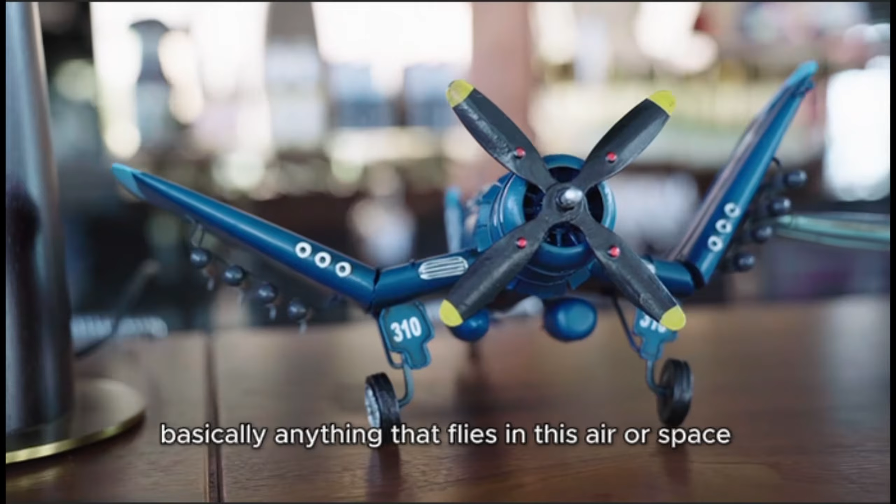I will start with introduction. The aerospace industry covers things like aircraft, spacecraft, satellites, and even missiles or drones. Basically, anything that flies in the air or space. Aluminum is one of the most used materials in this industry because it's lightweight but still strong, which is super important when designing things that fly.

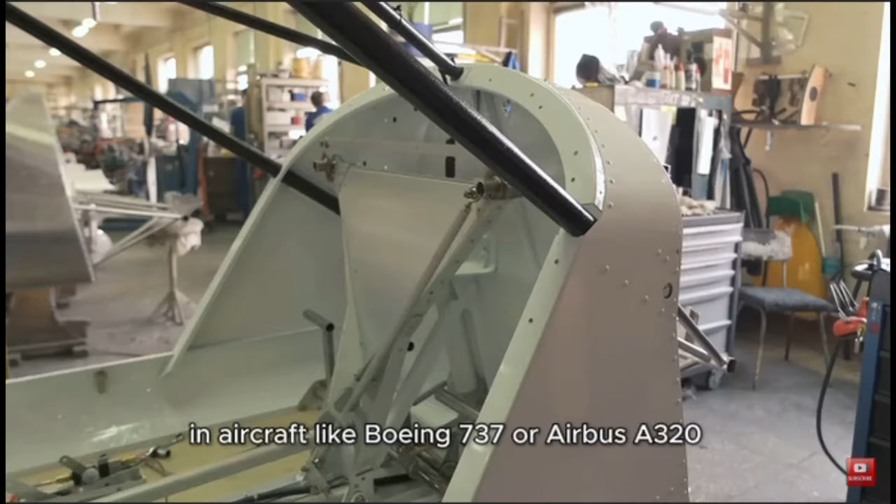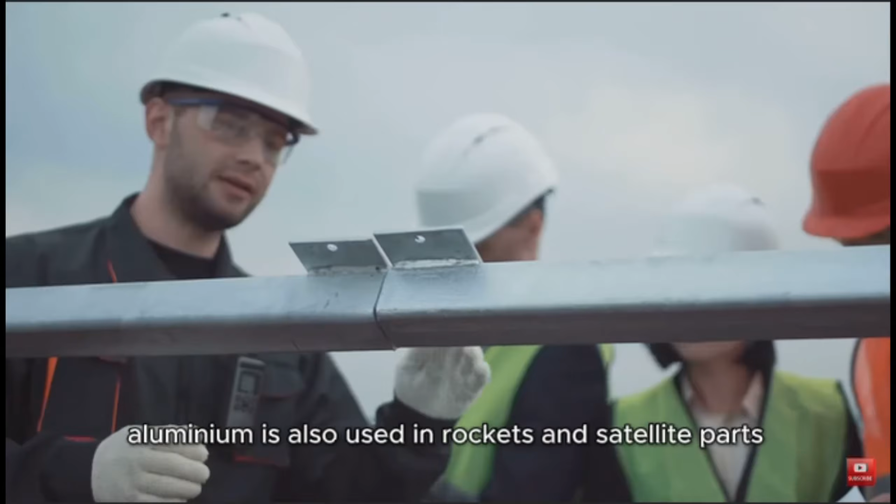For example, in aircraft like the Boeing 737 or Airbus A320, aluminum makes up about 70% to 80% of the structure, including wings, body, and landing gear. In space applications, aluminum is also used in rockets and satellite parts because it can handle high pressure and extreme temperature.

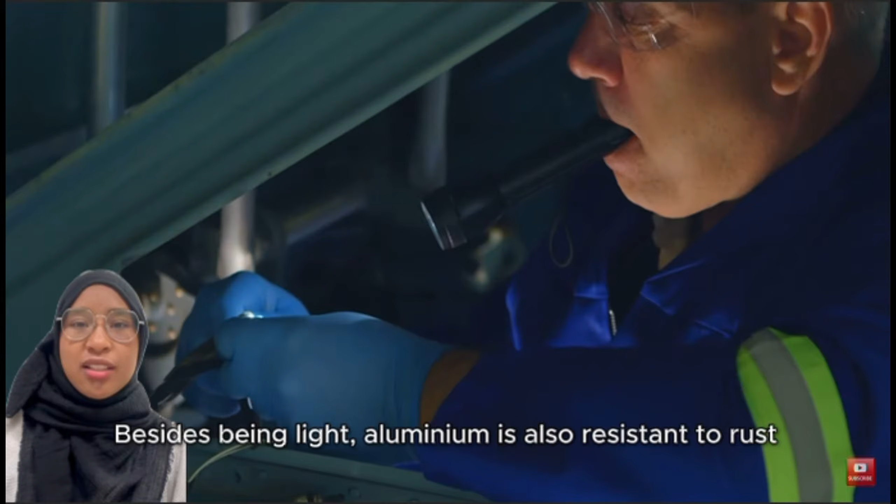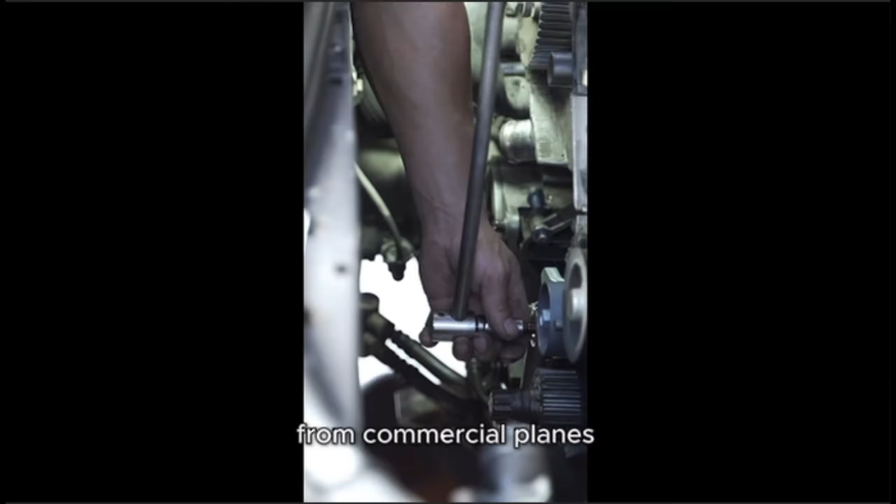Besides that, aluminum is also resistant to rust, easy to shape and recyclable, all of which make it ideal for building safe and efficient aerospace systems. That's why aluminum is still the top choice in many parts of the aerospace world, from commercial planes we fly in to space missions reaching beyond Earth.

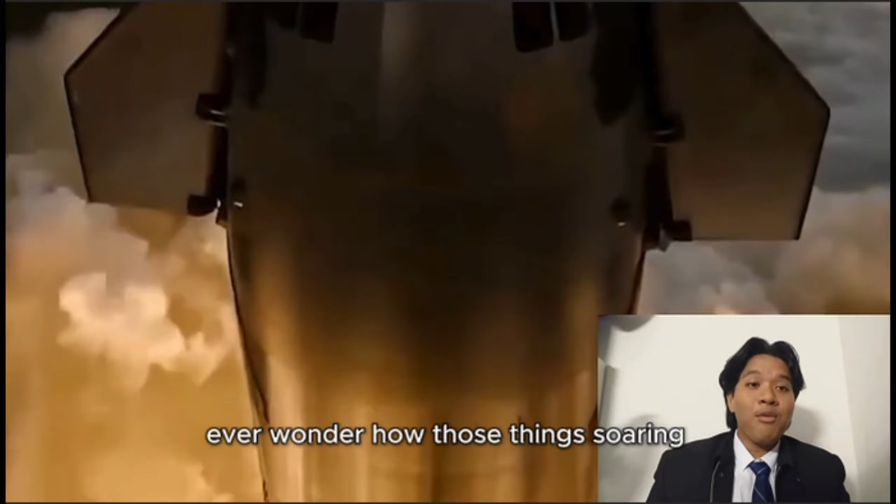Ever wonder how those planes are soaring and rockets launching into space? No, it's not magic, it's science. And at the heart of it all is an incredible metal you might take for granted, aluminum. So let's know more about aluminum, shall we?

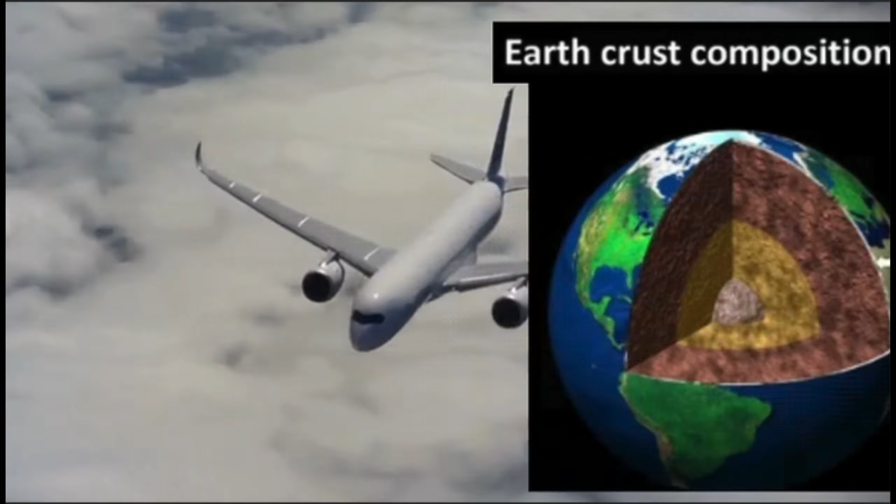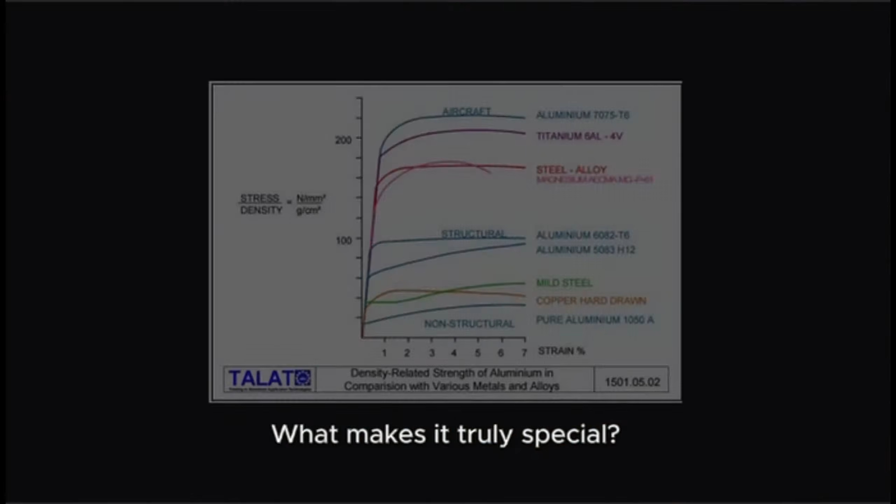Aluminium is the third most abundant element in Earth's crust, but pure aluminium is soft. So how does it become a powerhouse material for aerospace? The secret lies in alloying. By adding small amounts of other elements like copper, zinc, magnesium, and lithium, engineers transform soft aluminium into super strong alloys. It's much stronger. What makes it truly special? Its incredibly low density. Imagine materials that are as strong as some steels, but a fraction of the weight.

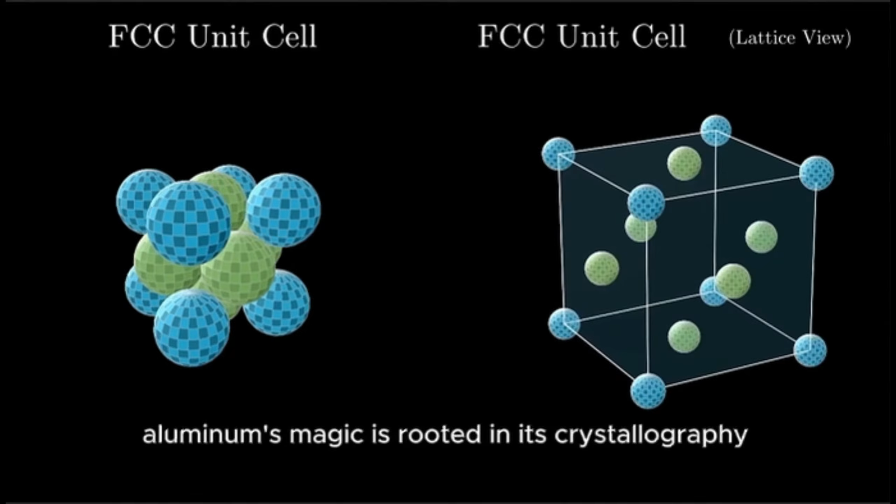Delving deeper, aluminum's magic is rooted in its crystallography. Pure aluminum has a face-centered cubic structure. This dense atomic arrangement makes it strong and stable while giving it many slip systems, allowing it to deform without breaking. Perfect for shaping those complex aircraft parts.

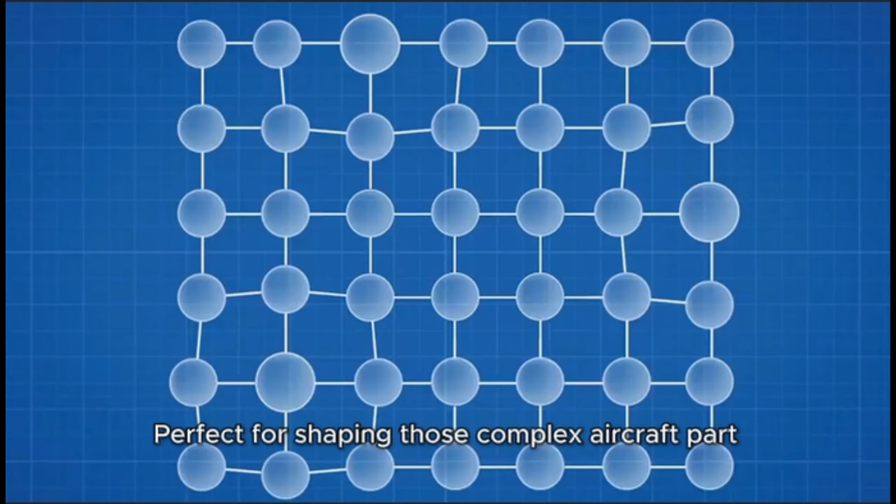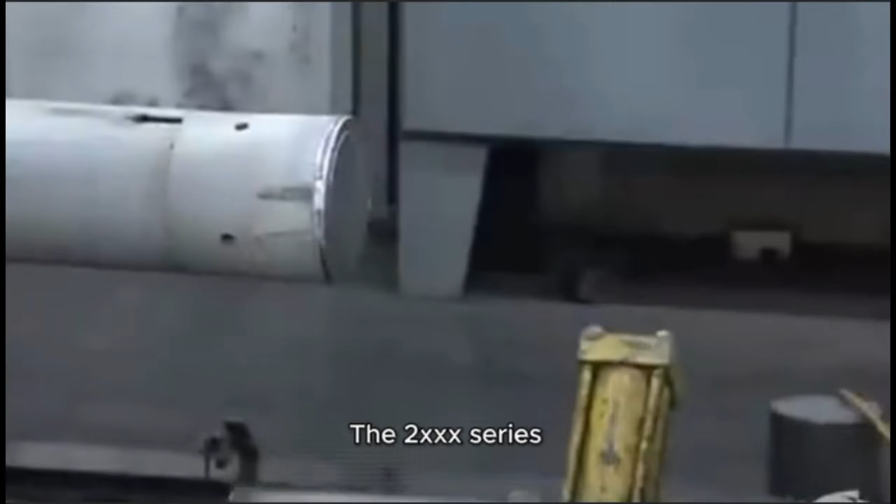The aerospace industry primarily relies on two star players in the aluminum alloy family, the 2000 series and the 7000 series. The 2000 series, with copper as its main alloying element, are known for their very high strength, achieved through precipitation hardening. They are perfect for aircraft skin and structural components, providing an excellent strength-to-weight ratio.

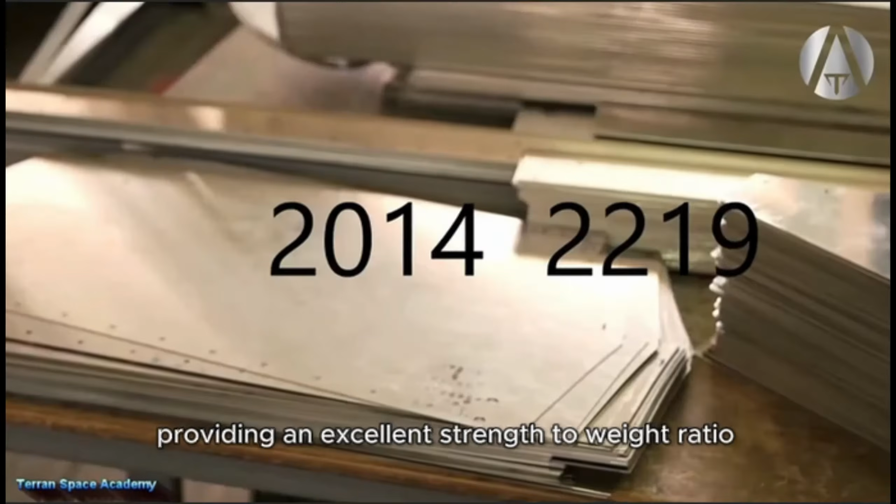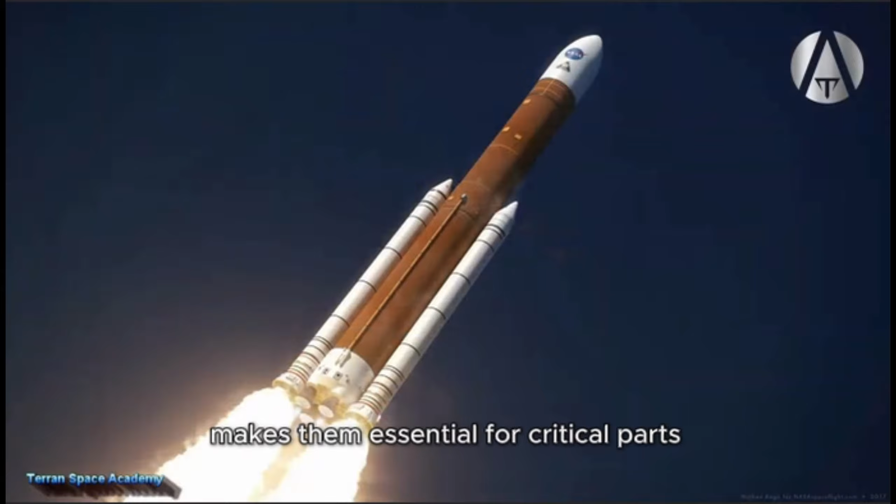Then there's the 7000 series, primarily alloyed with zinc, often with magnesium and copper. Alloys like 7075 and 7050 are the absolute strongest. Their unparalleled strength and fatigue resistance make them essential for critical parts like wing spars and landing gear.

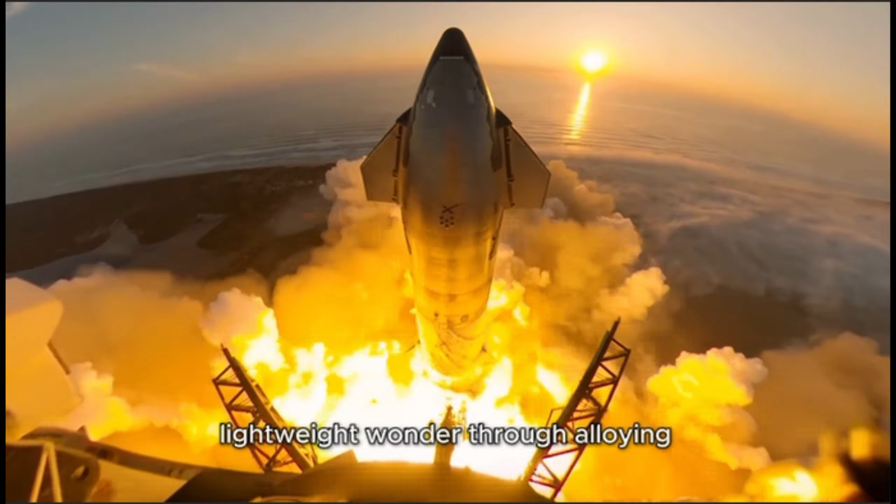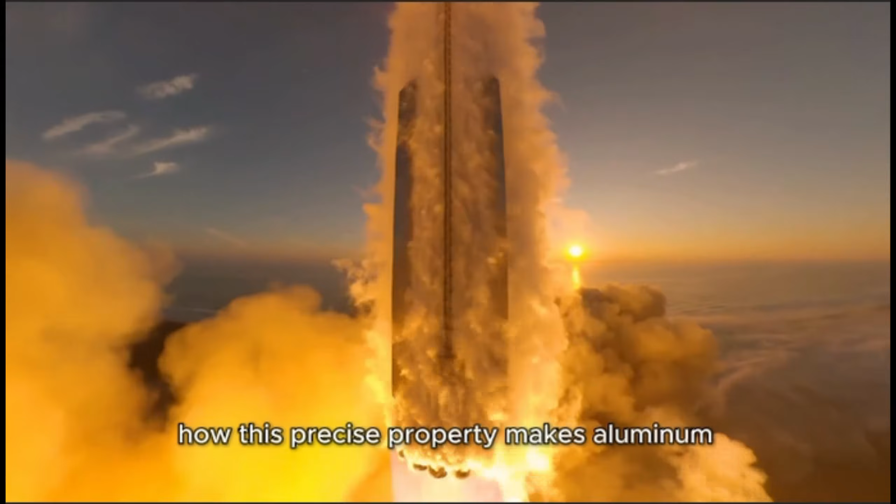Alright, we've seen how aluminium goes from a soft, abundant metal to a strong, lightweight wonder through alloying. But why is this transformation so epic for planes and rockets? It's all about unlocking those critical properties. So get ready to discover how these precise properties make aluminum the ultimate material for pushing the boundary of flight.

Okay, Assalamualaikum warahmatullahi wabarakatuh. My name is LUQMAN Al-Hakim bin ZUHABRI, and I'm going to present to you guys about the critical properties of aluminium alloys.

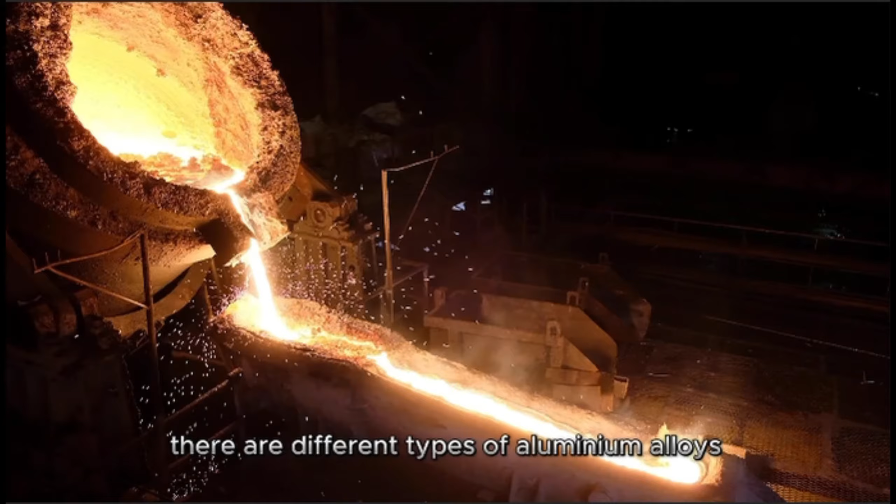There are different types of aluminium alloys used for different parts of a plane. For example, there is 2024 T3 that is used on a plane's body and wings because it is strong and can handle repeated stress very well. It is perfect for parts that face pressure differences and changes during every flight.

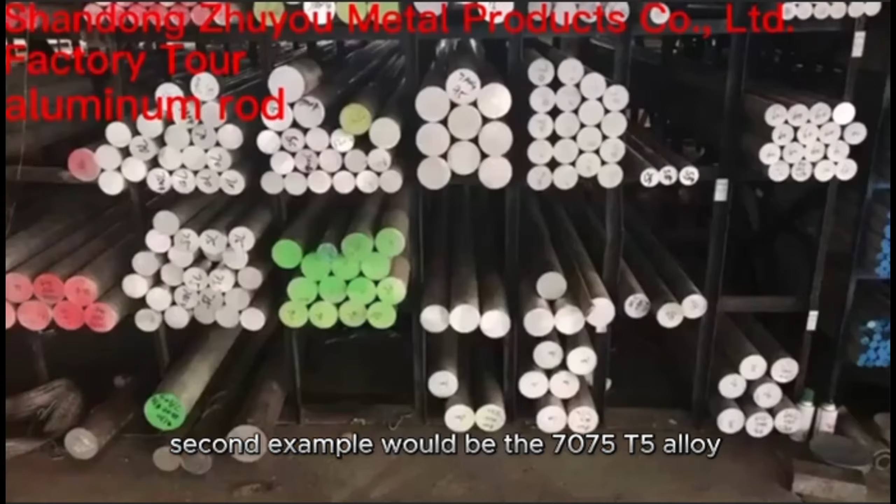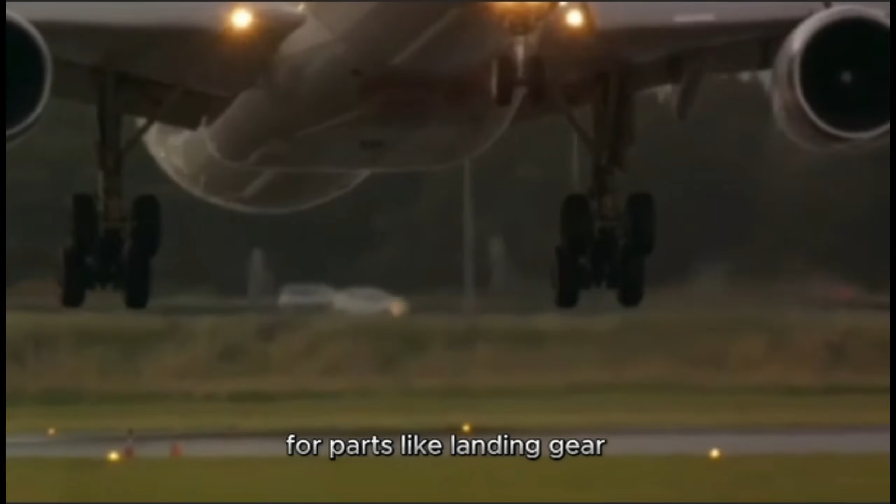Second example would be the 7075 T5 alloy. It is actually one of the strongest aluminium types. It is usually used in military planes for parts like landing gear and wing supports. Since it can rust more easily, it usually has to get a protective coating. And even though aluminium alloys are not used greatly for carrying electricity, sometimes they are still used for things like grounding or blocking signals.

So in summary, aluminium alloys are still very important in making aircraft. Each type is chosen carefully depending on what the part needs, whether it is strength, flexibility, or rust resistance.

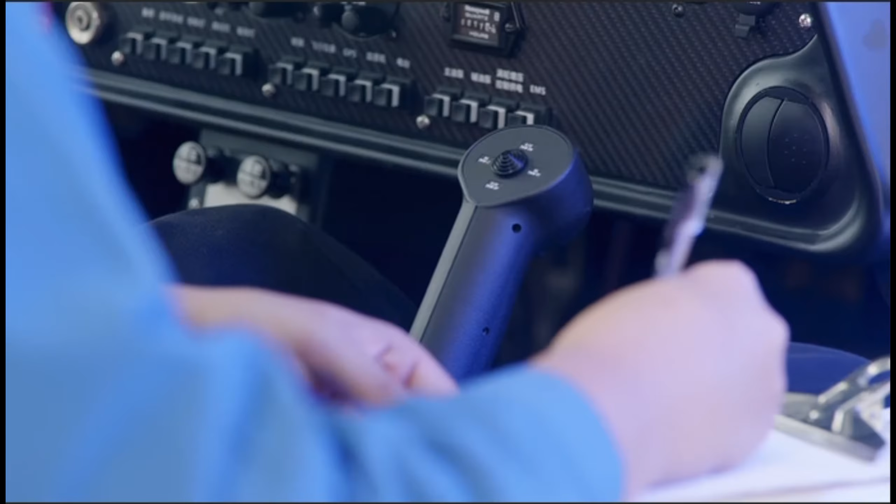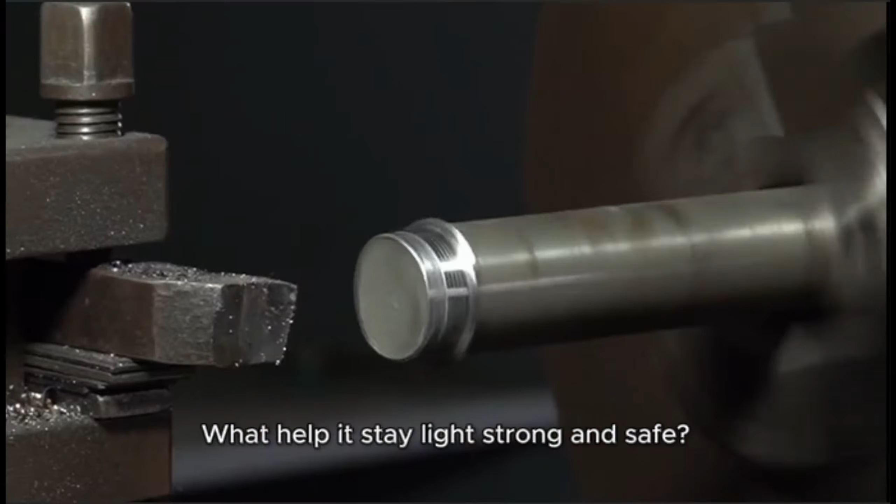Hello, I'm Non and I will continue from here talking about the advantages of aluminium in aerospace applications. Have you ever wondered what airplanes are made of? Let me show you something interesting. It's all about aluminium. So why is aluminium important in planes? Imagine a plane flying high in the sky. What helps it stay light, strong and safe? One big reason is aluminium.

Aluminium is very light but also very strong. A lighter plane uses less fuel, flies faster, and carries more weight. Some types of aluminium are almost as strong as steel, but only half of the weight. And we also know that planes fly through rain, snow, and changing air pressure.

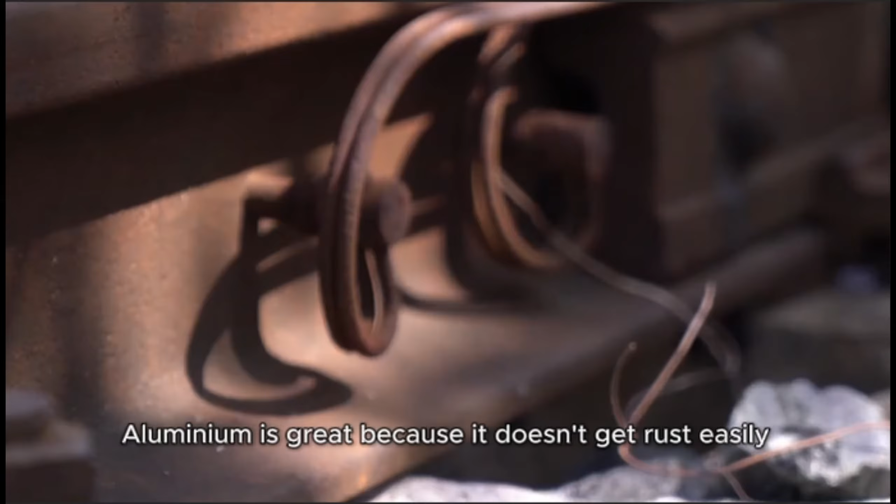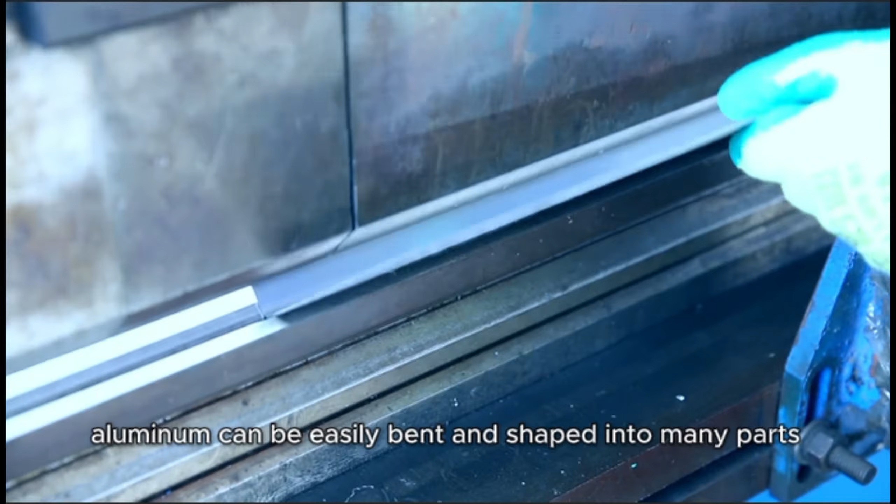Aluminium is great because it doesn't rust easily. This helps plane parts last longer and keep passengers safe. Also, aluminium can be easily bent and shaped into many parts, like wings, panels, and more. That means planes can be built faster and at lower cost.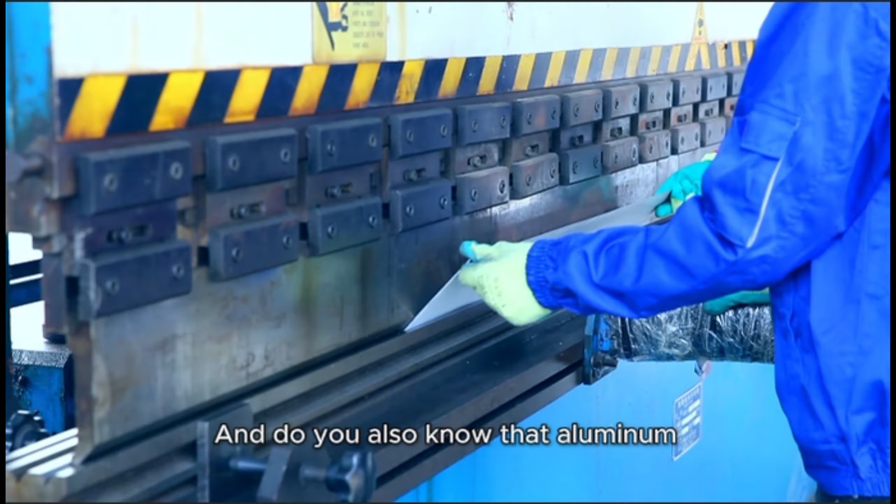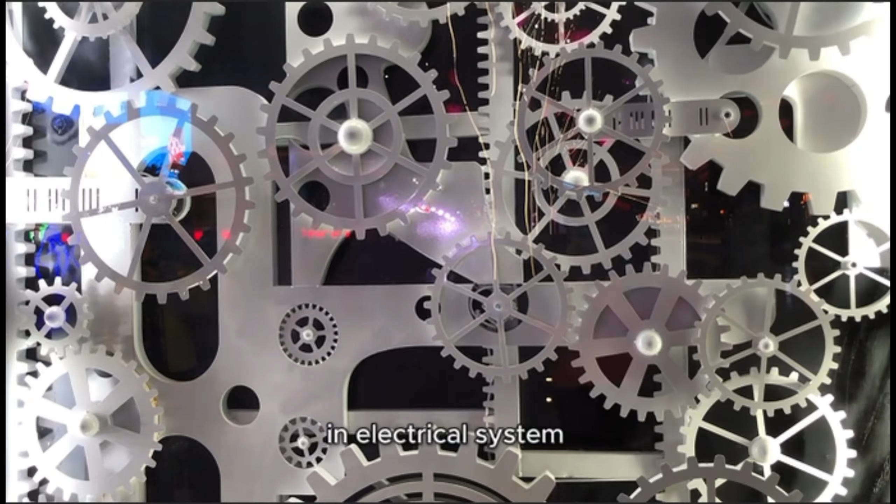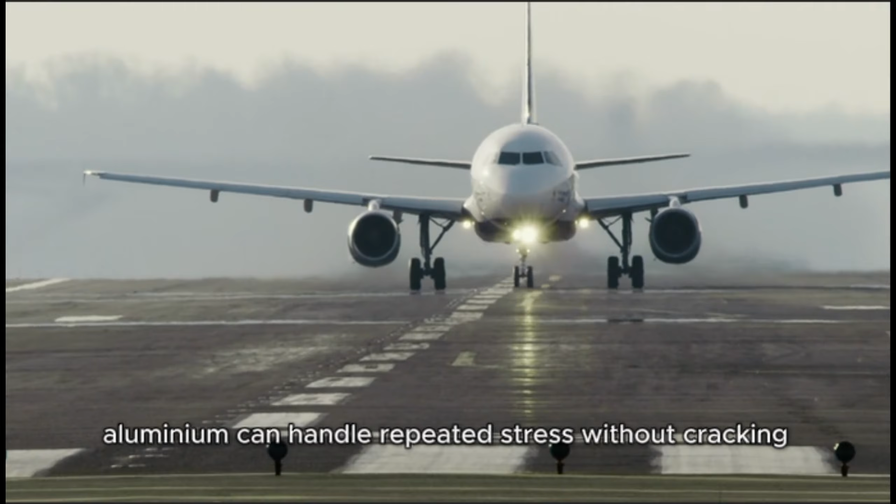And did you know that aluminium helps control heat from engines and electronics because it moves heat away quickly? It also helps in electrical systems by carrying electricity and protecting other parts. Another advantage is that planes take off and land many times. Aluminium can handle repeated stress without cracking. That is why it's used in wings, landing gear, and key parts of aircraft.

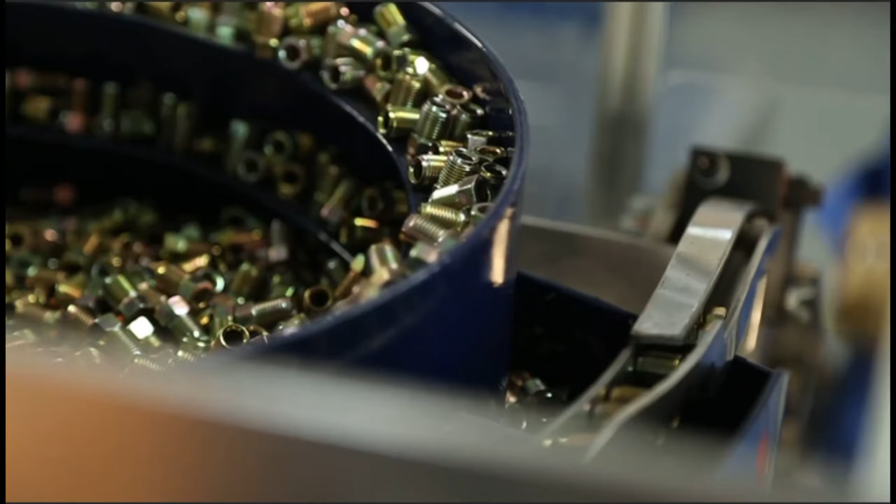At last, I want to say that aluminum is 100% recyclable. We can melt it and use it again without losing strength. It also needs less energy to recycle, which helps protect our planet better than other materials. Compared with the other options, steel is too heavy, titanium is expensive, composites are hard to recycle, but aluminum is light, strong, cheaper, and easy to reuse. So the next time you see a plane, remember aluminum is a hidden hero that helps it fly.

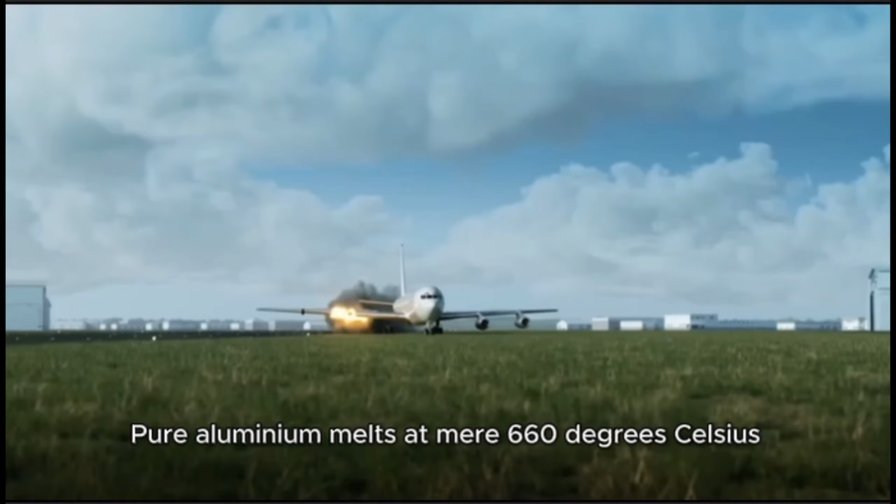Aluminium, the backbone of modern aviation, lightweight, strong, and seemingly perfect for flight. But beneath this shiny surface lies a darker truth. Today, we uncover the hidden challenges that threaten every aircraft in our skies. The first enemy is heat. Pure aluminum melts at a mere 660 degrees Celsius, dangerously low for aircraft engines that burn at over 1000 degrees. Even advanced aluminum alloys can only handle 500 degrees before fading.

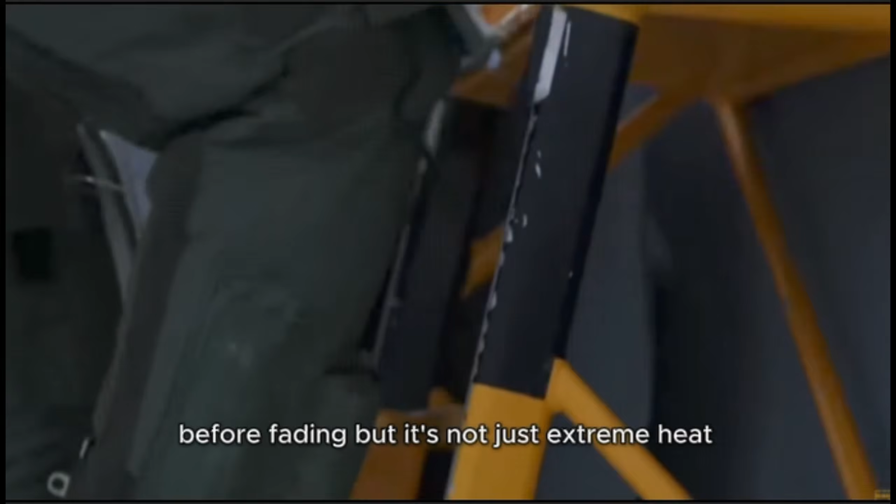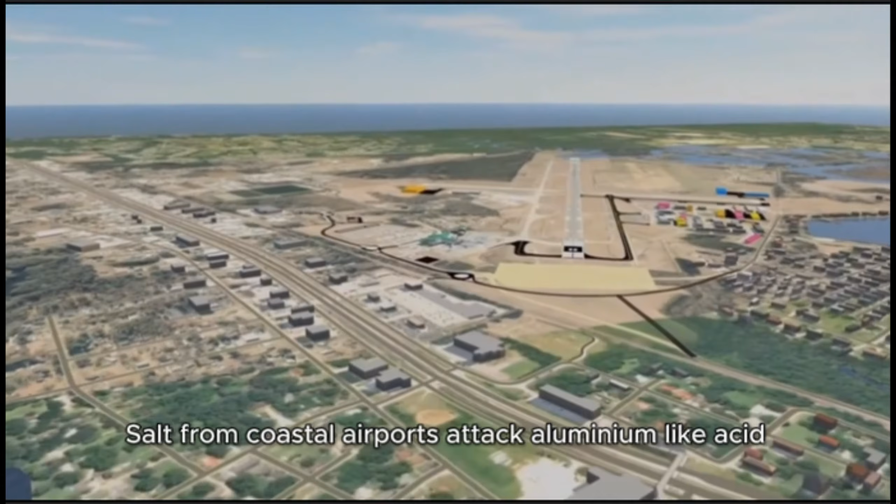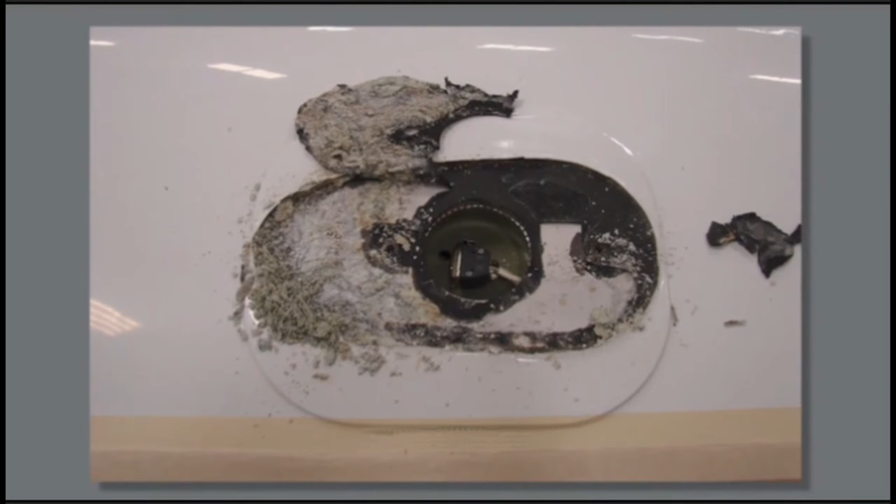But it's not just extreme heat. Every flight subjects aluminum to brutal temperature swings, from -70 degrees at cruising altitude to +150 degrees near engines. This constant expansion and contraction creates invisible stress fractures that could spell disaster. The second threat lurks in the air itself. Salt from coastal airports attacks aluminum like acid, creating tiny holes that spread like cancer through the metal. Even worse, when aluminum touches other metals, steel bolts, titanium fittings, it becomes a sacrificial lamb, corroding faster to protect its neighbors.

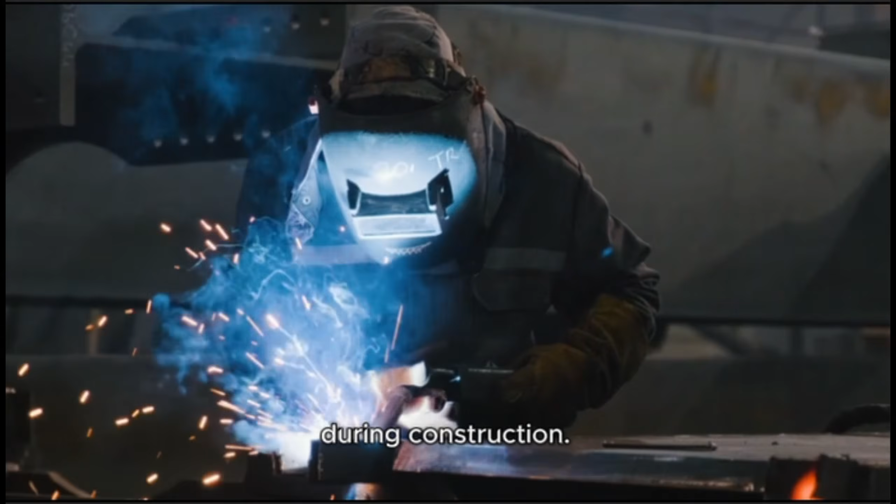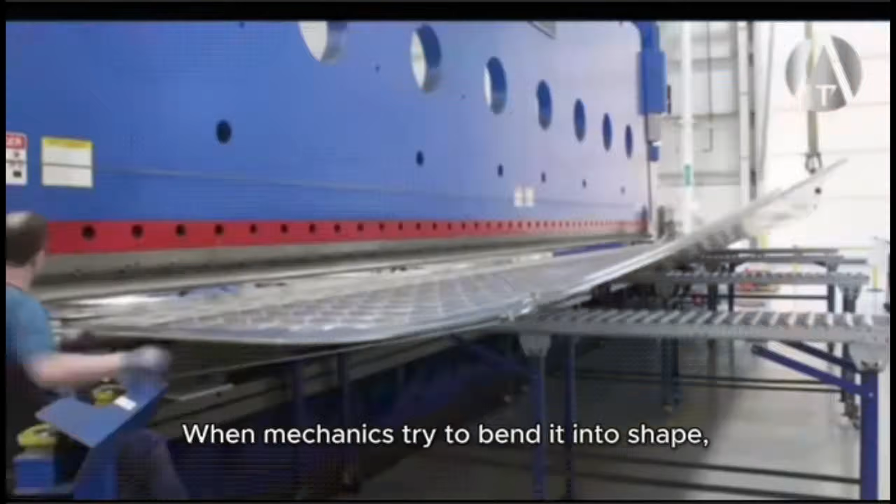Finally, aluminum fights back during construction. Its exceptional heat conductivity makes welding nearly impossible. The metal sheds heat faster than welders can apply it. When mechanics try to bend it into shape, aluminum hardens and springs back like a defensive spirit. Despite these challenges, aviation engineers continue their battle against aluminum's limitations. Through innovative alloys, protective treatments, and careful design, they keep us flying safely.

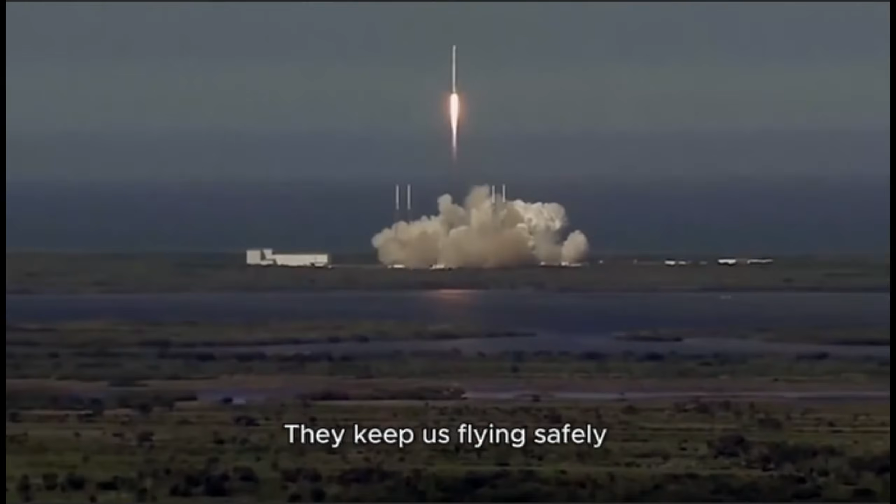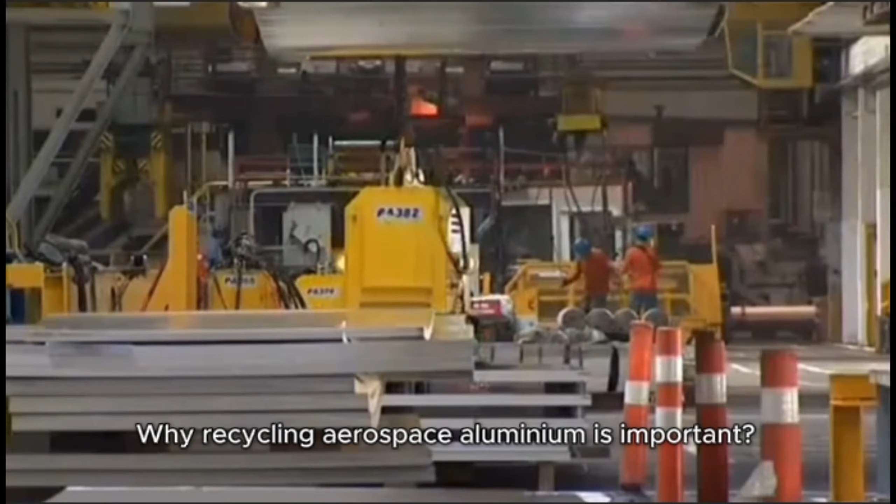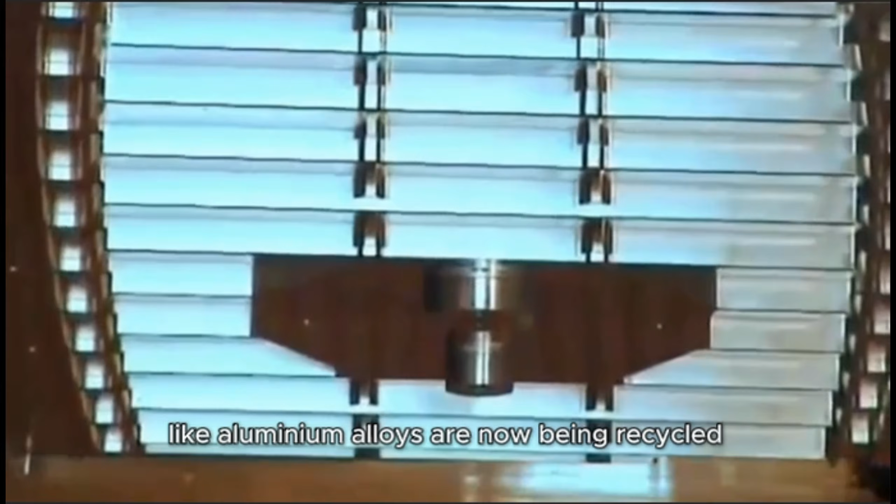Now, let's take a look at the development and recycling of aluminum in aerospace. Recent scientific work on aluminum in aerospace. Why is recycling aerospace aluminum important? The aerospace industry needs more sustainable manufacturing. High-performance materials like aluminum alloys are now being recycled, and the focus is on 7075 aluminum alloy, commonly used in aircraft.

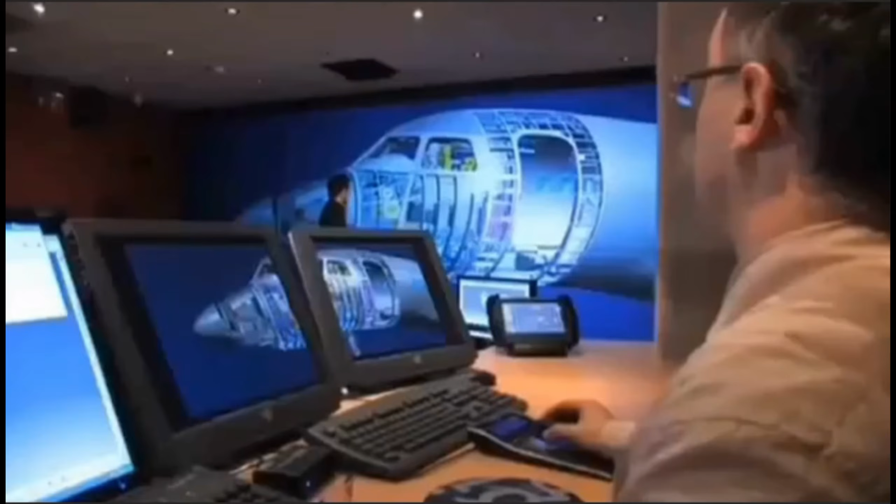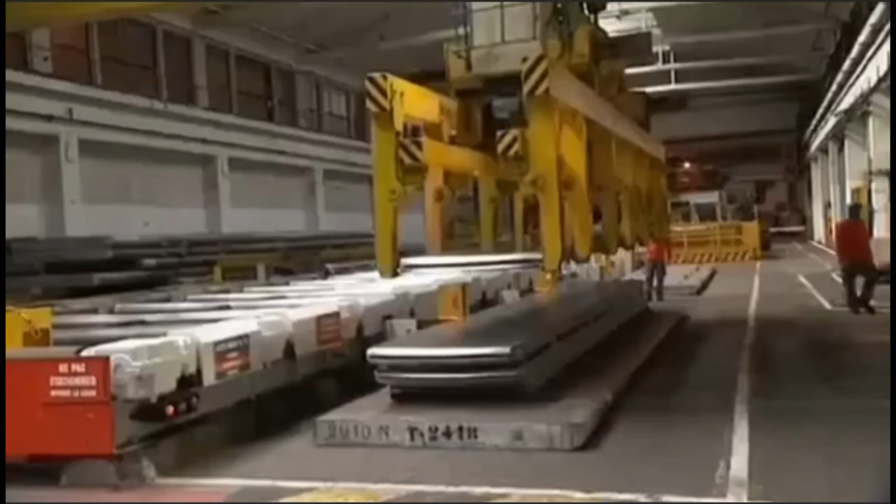Main challenges in recycling. First, sorting scraps. Aircraft scraps are often mixed with other materials. This makes sorting difficult and reduces reuse value. Second, impurities in the melt. The large surface area of scraps leads to more unwanted particles in the melted metal, which affects the purity and quality of the recycled alloy. Types of aerospace aluminum scraps. First, aircraft dismantling scrap comes from old aircraft. Second, machining scrap, leftover from manufacturing.

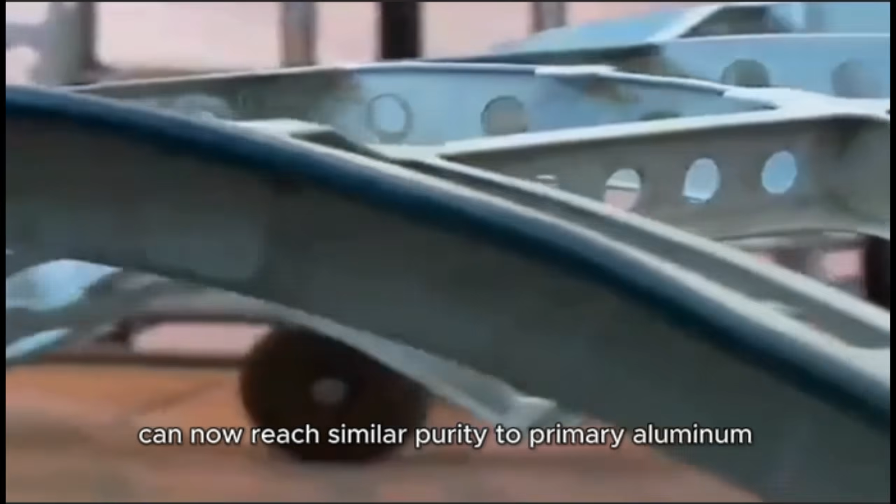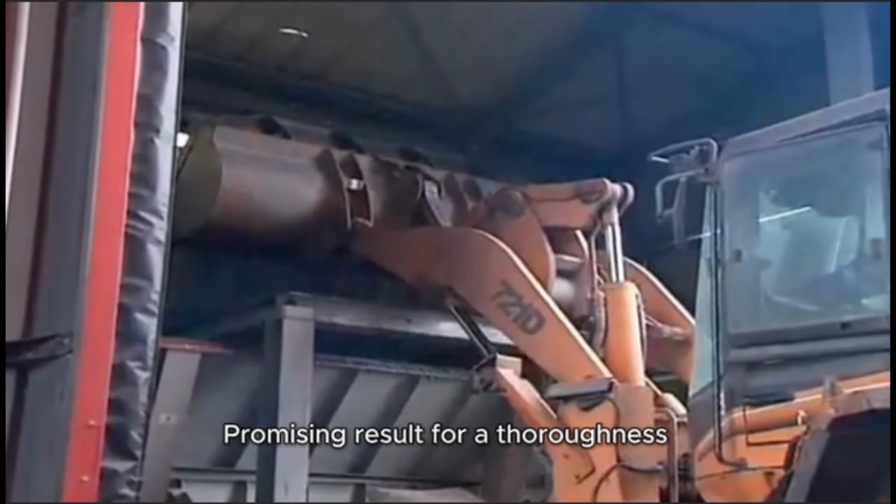Key findings from the study. Recycled aluminum melts can now reach similar purity to primary aluminum. Microstructure and strength of recycled alloys should match those of primary alloys, a promising result for airworthiness certification of recycled materials.

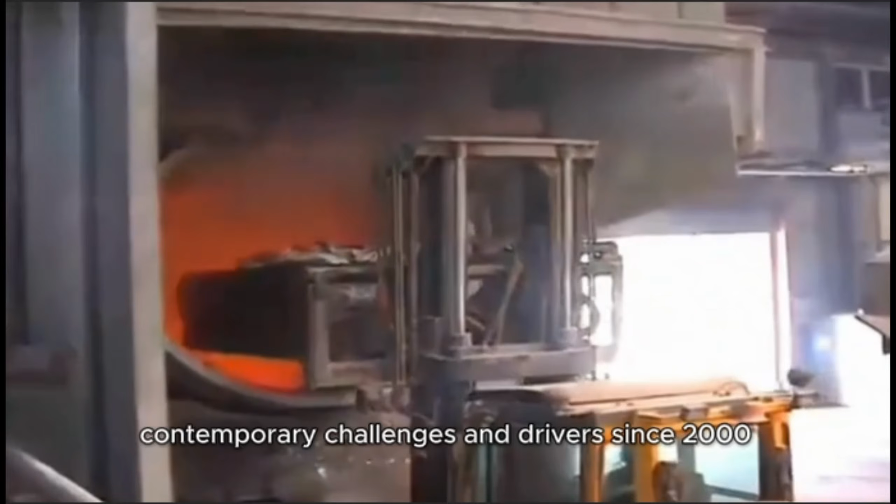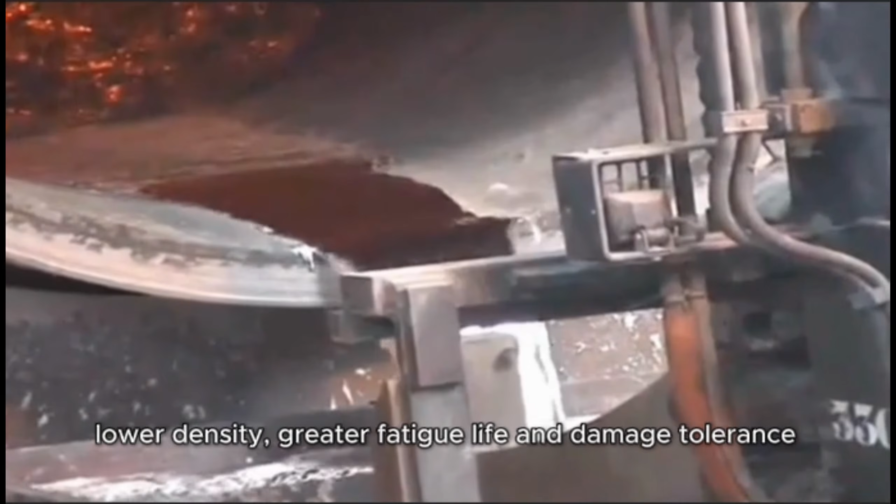In-depth analysis of the development and applications of aluminum alloys for the aerospace industry. Contemporary challenges and drivers since the 2000s. Modern demands: higher strength-to-weight ratio, lower density, greater fatigue life and damage tolerance, better toughness and corrosion resistance. Second, an evolving material landscape, the rise of new high-performance materials, and pressure on aluminum alloys to innovate and stay competitive.

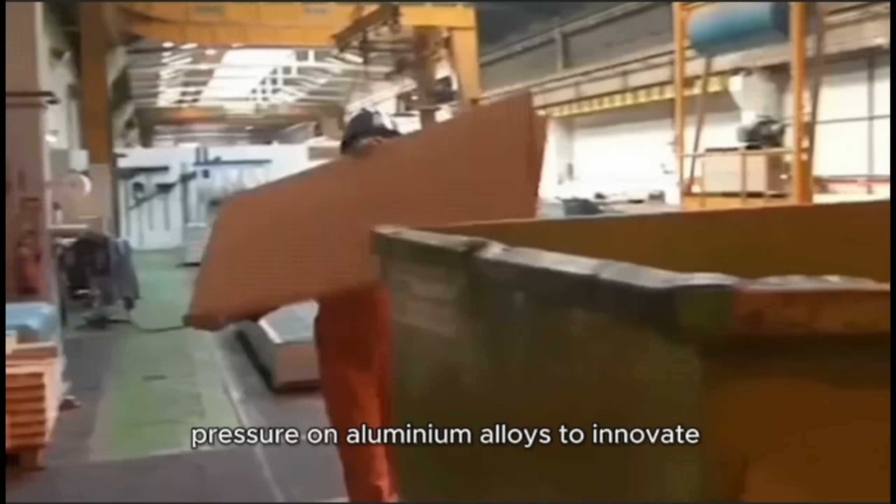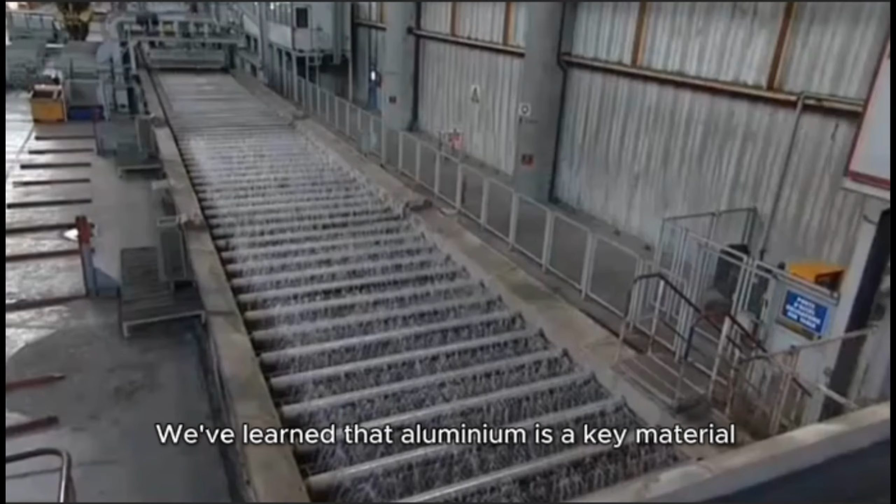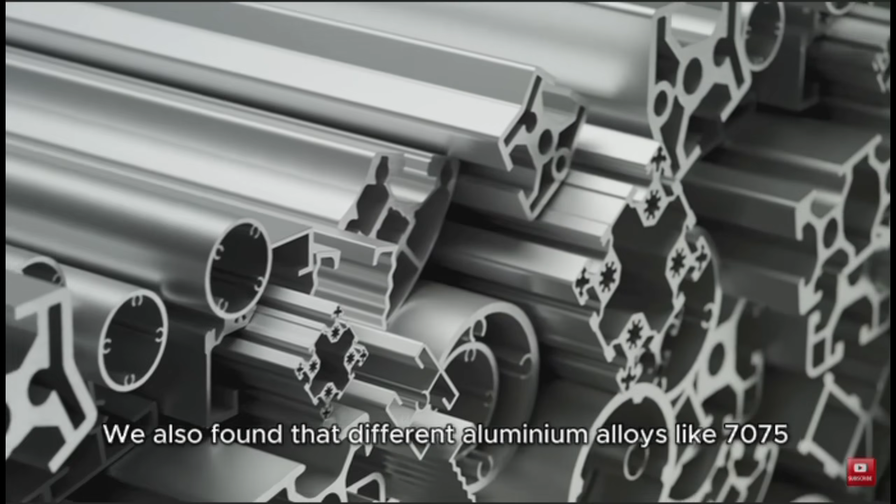I'll now conclude our presentation on aluminium in the aerospace industry. From this project, we've learned that aluminium is a key material used in both aircraft and spacecraft, mainly because it's lightweight, strong, and resistant to corrosion. It helps make planes safer, faster, and more fuel efficient. We also found that different aluminium alloys like 7075 and 2024 are specially chosen depending on what part of the aircraft they are used for, whether it's the wings, fuselage, or even inside the space shuttle.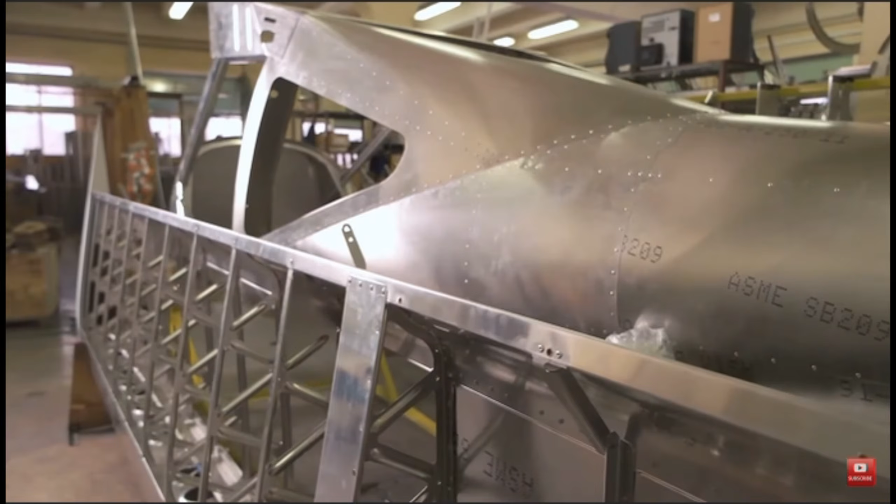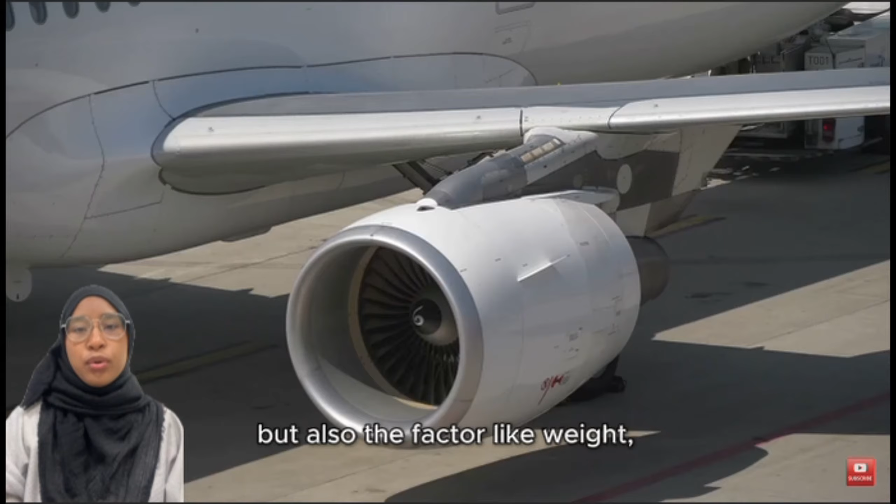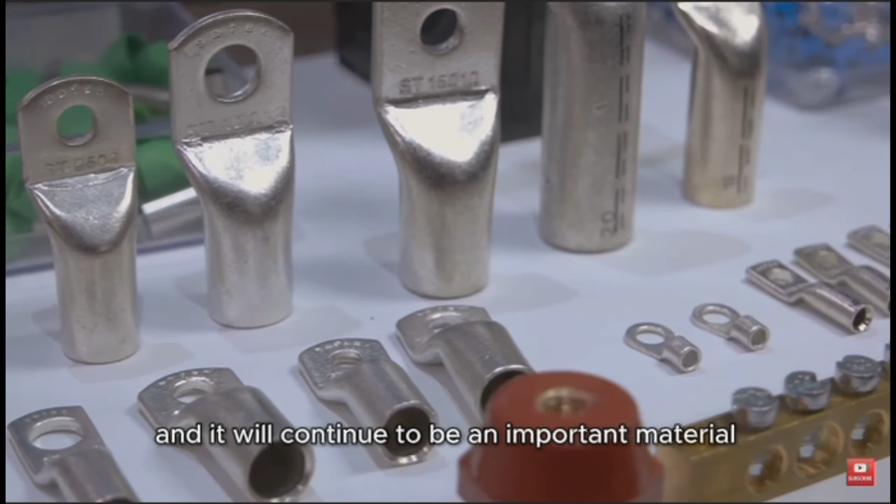This topic helps us understand how material selection in engineering isn't just about strength, but also factors like weight, cost, and environmental impact. So overall, we've seen how aluminium plays a huge role in real-life aerospace applications, and it will continue to be an important material as the industry grows and improves in the future.